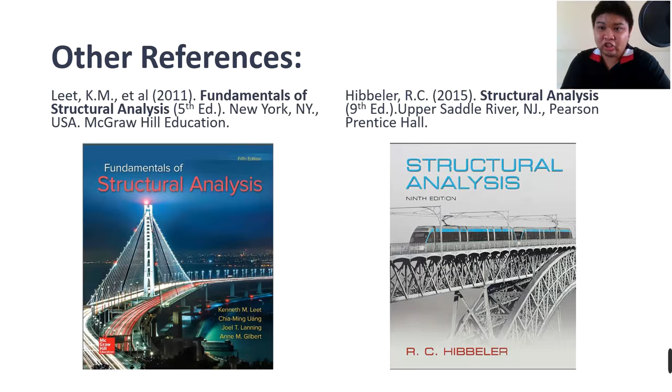So what are my references? My main reference is the book of Aslam Kassimali entitled The Structural Analysis, SI version, 4th edition. I also use other references like the book of Kenneth M. Leet and others, The Fundamentals of Structural Analysis, 5th edition, and of course the book of Russell Hibbeler, Structural Analysis, 9th edition. So now let's start na.

So yung unang topic natin is the analysis of propped beams. I-define muna natin guys kung ano ang prop beam. By definition, a propped, or in formal term, a singly restrained beam is a type of beam that has fixed support in one end and simple support in the other side of the beam. Usually it is considered as statically indeterminate beam to the first degree.

Thus, the beam has one redundant reaction. So napaka-straightforward lang naman ng definition niya. May fixed support siya at the same time may simple support. Pwedeng magkabaliktad yan, plus pwedeng dito sa kaliwa, this is a simple support and sa kanan is the fixed support. Let me remind you from our discussion sa analysis of beam, you may look for the playlist of that in my YouTube channel. So alam natin na ang ibig sabihin ng simple support, it can be hinge, it can be roller.

Kasi for as long as beam ang pinag-uusapan natin, hindi na natin na-distinguish ang pinagkaiba ni hinge saka ni roller. And lastly, para mapatunayan natin that the structure is statically indeterminate to the first degree, kung maalala niyo sa criteria for the stability and determinacy ng structure. So ano nga yun? The reaction ba is less than, equal, or greater than 2M. I-remind ko lang kayo na this is 2M kasi beams ito. Pero kung 3M ito, kino-consider na natin yon generally including the frames, right? Okay, so ito ang gagamitin natin.

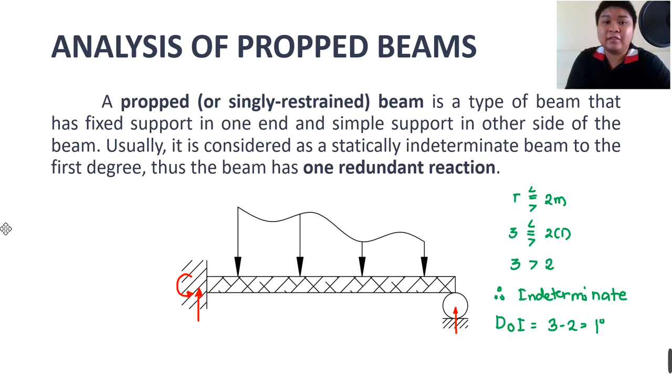Okay, itong discussion natin, mas maiintindihan natin siya kapag may given na example. Magsasagot ako dito ng isang example. Well, of course, the other following videos, yun naman yung other examples. Kasi naniniwala ako na mas maiintindihan niyo yung topic kapag mas exposed kayo sa maraming example. So sige, simulan na natin yung pag-solve.

So ito na yung example number 1, this is a very basic one. A propped beam is loaded as shown below. Assume that the beam is homogeneous and prismatic. Kung maalala niyo last time, when we say homogeneous, the material is constant all throughout. So halimbawa, steel, dapat steel siya all throughout. Hindi pwedeng steel dito sa first half, then copper on the other half. Hindi na yun homogeneous.

So yun yung ibig sabihin ng word na homogeneous. And when we say prismatic, if you recall, ang meaning ng word na prismatic, yung cross-sectional dimension ng ating section ay parehas all throughout. So kung bilog dito, dapat all throughout. Kung ano yung diameter dito sa left end, ganun din. Sa midspan, lahat hanggang sa right end. So yun yung ibig sabihin ng word na prismatic.

And sa analysis natin, ang ibig sabihin guys ng word na homogeneous and prismatic, ang buong span ng ating beam ay merong constant na flexural rigidity. So it has a constant flexural rigidity.

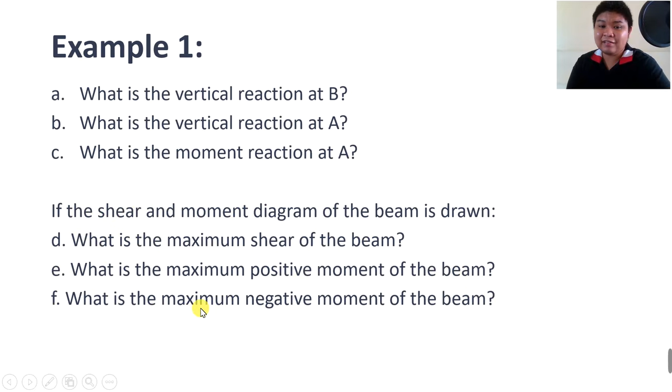So what are the questions here? For example number 1, what is the vertical reaction at B? Number 2, what is the vertical reaction at A? Number 3, what is the moment reaction at A? Then, if the shear and moment diagram of the beam is drawn, number 4, what is the maximum shear of the beam? Number 5, what is the maximum positive moment of the beam? And lastly, what is the maximum negative moment of the beam?

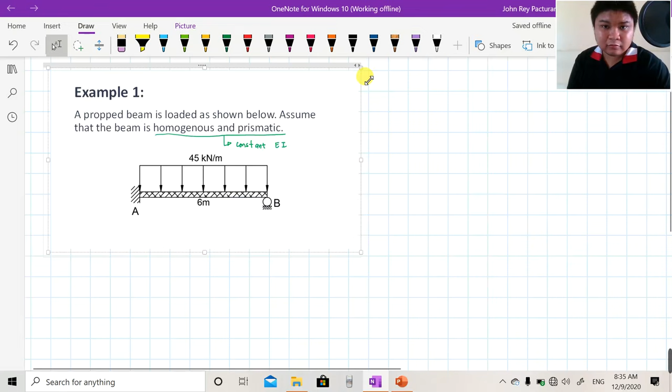So, sige guys, simulan na natin yung ating analysis. Punta tayo sa OneNote, tapos simulan na natin tong i-solve. I-paste ko lang din itong mga question. Ayan na. Okay, so simulan na natin tong i-solve.

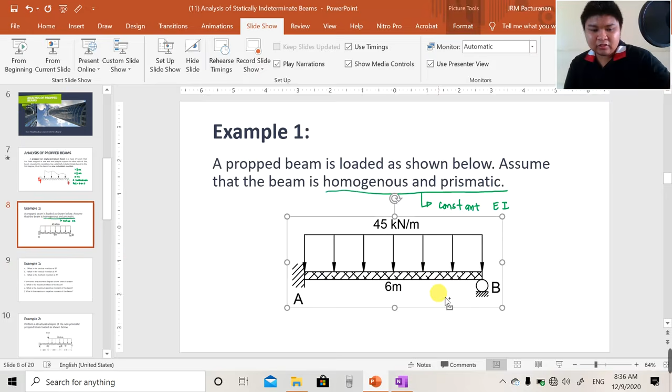Solution. Well, of course, since this is an indeterminate structure, napag-aralan na natin na meron din nitong tatlong reactions, di ba? Kunin ko muna to, Control C, tapos punta tayo sa ating OneNote. Wait lang, i-drawing ko na lang tuloy. Mano-mano, madali din naman tong i-drawing.

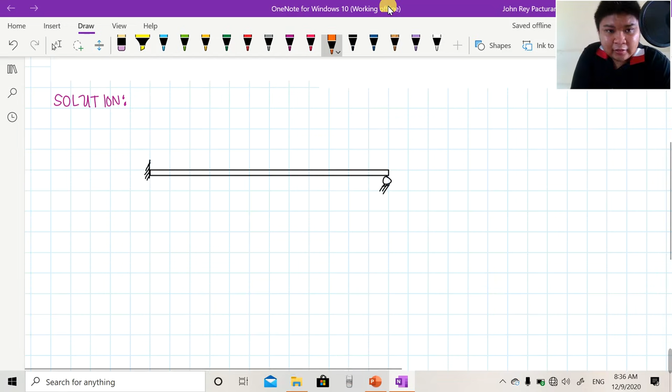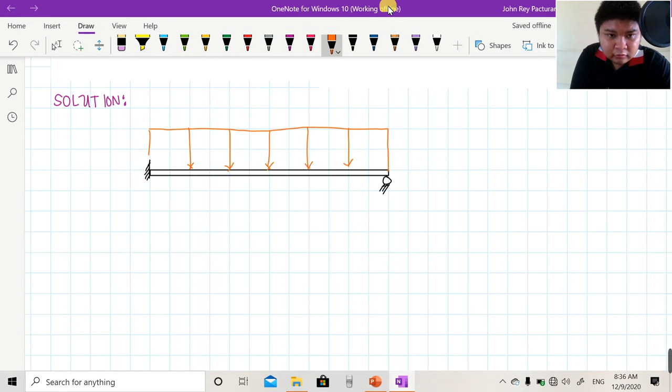So 6 meters yung span natin and the beam is loaded with uniform load all throughout the span. So ito yung simple support, tapos ito yung fixed support, and our magnitude of load ay 45 ba? Check natin siya, no? So ayan. 45 kilonewton per meter. So, 6 meters.

And ilagay na natin class yung mga reaction. So, for instance, ang RB, tapos RA, and lastly, moment at A. So, ito yung ating mga reactions na i-consider.

So, ang goal natin dito is hanapin muna natin class yung isa dito sa tatlong reactions using either the double integration method, the moment area method, and the conjugate beam method. Okay, actually, pwede naman gamitin yung virtual work method, pero reserve na lang yon for the next chapter, which is the analysis of statically indeterminate structures using the force method. So ngayon, ang tututukan lang natin dito is yung double integration, tapos area moment or moment area and the conjugate beam.

So halimbawa, pwede mong isolve yung RA lang or yung MA lang, pero mas preferred dito na kapag prop beam ang pinag-uusapan yung reaction sa simple support, itong RB. And ang goal natin, after nyong ma-solve class yung reaction sa RB, gagamitin mo na lang yung equations of equilibrium to solve for the other reactions. Okay? So, sige, yun yung unang goal natin, solve for RB.

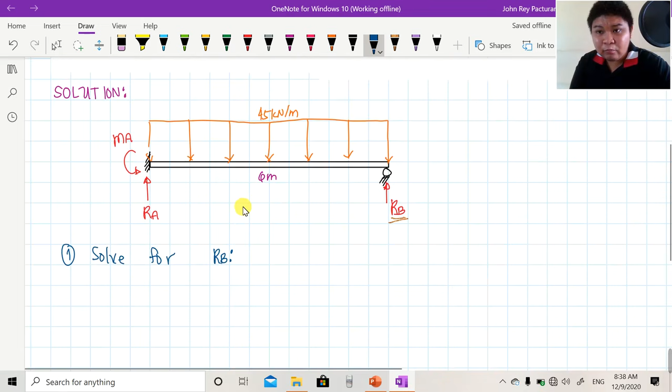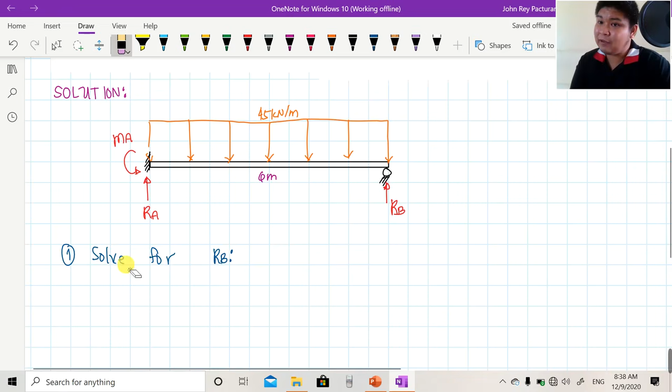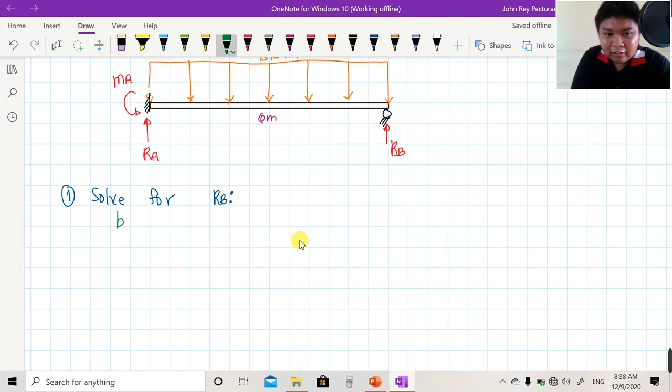So for this video, ipapakita ko kung paano natin siya isosolve using the double integration method, the moment area, and the conjugate beam. So lahat ng tatlong yon para at least after nyong makita, pipili ka na lang kung alin doon sa tatlo ang trip mong gamitin in the future analysis. And yun na nga, as I said, sa following example, for the future examples nito, isang method na lang yung gagamitin ko. But for the meantime, gusto ko munang i-illustrate kung paano natin isosolve yung RB using the double integration method. So by DIM, pwede muna natin na hanapin yung MA tapos yung RA in terms of RB.

Okay? So, Control C muna tayo. Tapos, paste natin siya dito. Control V.

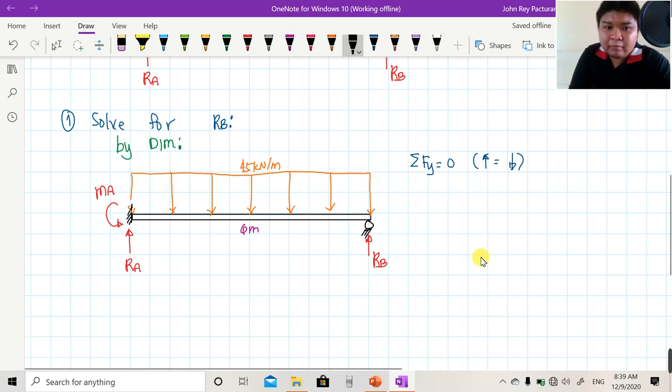Sige. Using equation of equilibrium muna tayo. Summation, forces, vertical equals 0. So, up equals down. Ang mangyayari dito, meron tayong upward force na RA, tapos meron tayong RB na upward, and that is 45 times 6. So therefore, ang RA natin in terms of RB, kapag kinompute mo yung 45 times 6, ang magiging sagot ay 270. So syempre, minus RB. So ang point ko dito, pwede naman na nating palitan class yung RA into 270 minus RB. So para lahat na ng reactions natin ay in terms of RB.

So the same thing ang gagawin natin para mahanap natin yung moment sa A na naka-express sa RB. So summation moment at A equals 0, clockwise moment equals counterclockwise. So ang clockwise moment natin is actually isa lang, di ba? Yung 45 kilonewton, tapos multiply natin ng 6, multiply natin ng 6 over 2, the rest ay counterclockwise. MA, tapos plus RB times 6.

So therefore, yung MA natin, kapag kinompute natin yung 45 times 6 times 6 over 2, ang magiging sagot ay 810 minus 6RB. Okay, isulat ko lang siya. Instead of MA, ang gagawin ko, 810 minus 6RB. So ayan, imbis na tatlo pa yung unknown natin, isa na lang yung unknown natin.

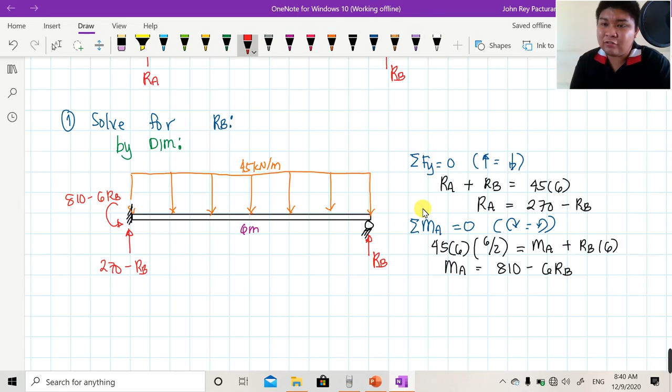And ang kagandahan dito, since yung ating load ay uniformly distributed all throughout, isang moment function lang yung kailangan nating i-derive. Okay, so therefore kailangan natin yan i-derive, kailangan mag-cut tayo dito.

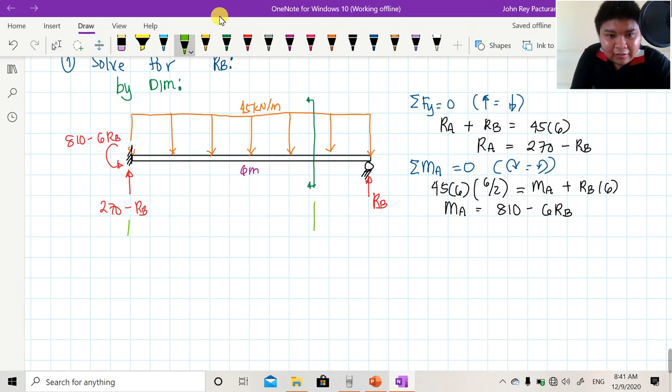So kung maalala nyo, palaging double integration. Tapos iseset natin itong distance na to as x. Okay, so by the way nakalimutan ko palang i-label na this is point A and this is point B. Now pag kinonsider natin itong point x, tapos ide-derive natin yung moment function niya.

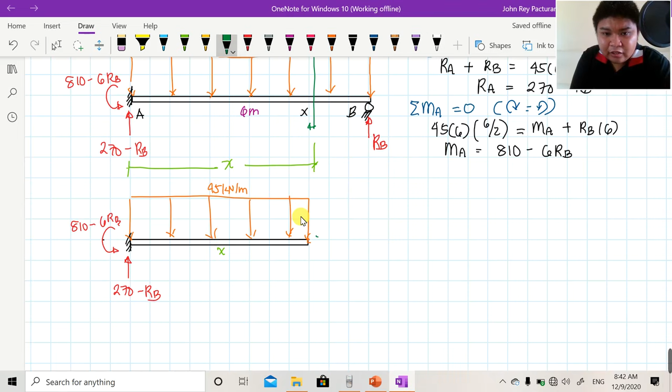So drawing natin siya class. This is 45 kilonewton per meter and this is the distance x. And again, ang ilalagay ko dito ay 270 minus RB and ang ilalagay ko na lang dito as reaction 810 minus 6RB. Ang concern natin is yung moment sa x, so syempre ilalagay natin dito as moment. So familiar naman kayo na dapat counterclockwise ang positive convention.

So again, ang kailangan natin gawin dito is ma-derive natin yung moment function. So summation, moment at x equals 0, clockwise moment equals counterclockwise moment. So ang clockwise moment natin actually, considering point A, considering point x, ay isa lang. Isa lang yung i-consider natin, yung 270 minus RB and ang distance niya ay x.

The rest ay counterclockwise, di ba? So 810 minus 6RB. Tapos yun din, kaya lang tama naman siya no? Yes, tama, kasi yung distance niya class ay x. So therefore, iseset natin siya as x raised to 0.

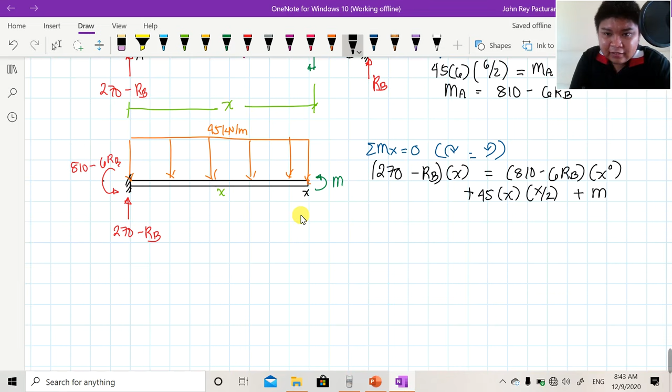Kung maalala nyo, ito ang ginagawa natin kapag double integration method. On the other hand, 45, tapos ang distance niya ay x, then x over 2. Lastly, yung moment natin. So pag sinimplify natin to, ang magiging dito ay 270 minus RB ng x. Then that is equal to 810 minus, para mas maganda ko na lang to times x, 810 minus 6RB times x raised to 0 plus, isimplify natin to, 45 over 2 x squared plus moment.

So yun, na-derive na natin yung magiging moment function dito. So yung moment function is equal to 270 minus RB ng x minus 810 minus 6RB x raised to 0 minus 45 over 2 x squared.

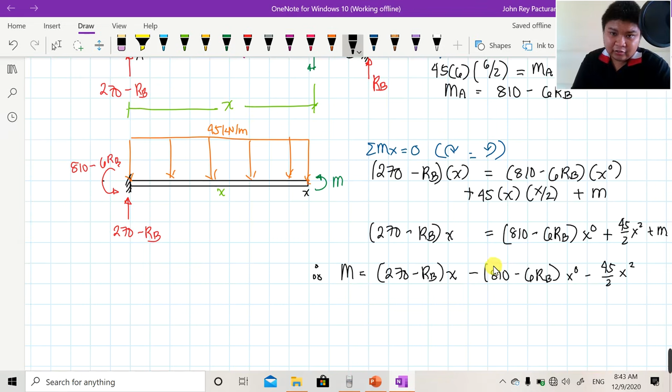So after natin ma-derive yung moment function, ang next na gagawin natin is ilagay ko muna dito na EI y double prime is equal to, isulat ko lang siya, yung na-derive natin before tayo mag-double integration. Ayan, so ready na tayo sa unang double integration or unang integration.

So ang magiging EIy prime natin ay 270 minus RB. And of course, instead of x, ang magiging ano dito ay 1/2 x squared. Tama ba? Yes, ganon. And next is magiging 810 minus 6RB. And from x raised to 0, magiging x to the first power lang. And lastly, minus 45 over 2, then lagay na natin dito na x cubed over 3. And of course, do not forget the arbitrary constant na C1.

So kapag inayos natin to, ang magiging kalalabasan ay 1/2 ng 270 minus RB, then x squared, minus 810 minus 6RB ng x. So lastly, yung 45 divided by 2 times 3 para ma-simplify natin, minus 15 over 2 ng x cubed plus c sub 1. So ayan guys, natapos na natin yung unang integration.

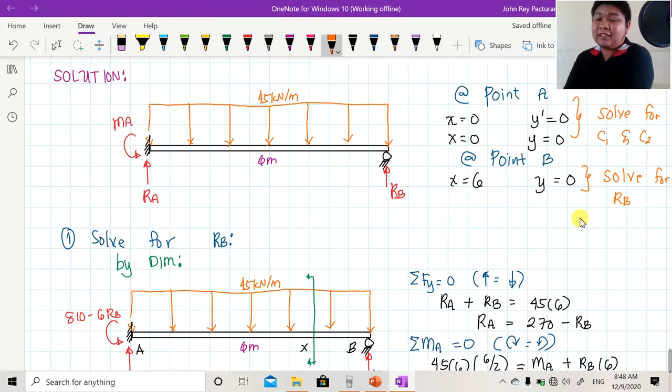So ano yung magiging purpose nito? Kasi kung maalala nyo, ang kailangan lang naman talaga natin ay dalawa. Okay, so itong unang dalawa, itong para sa fixed support, para ma-solve natin itong C sub 1 and C sub 2. Yun naman talaga ang purpose nitong unang dalawang boundary condition na nasa point A. However, itong pangatlong boundary condition, ito ang gagamitin natin para ma-solve natin yung mismong RB. Di ba? Para ma-solve mo yung mismong reaction. Okay, so ulitin ko, itong unang dalawang boundary conditions sa point A, gagamitin natin yan para ma-solve mo yung C sub 1 and C sub 2. Pero itong ating point B, gagamitin natin yan to solve for RB considering the double integration method.

Okay, so sulat natin yan na solve for C sub 1 and C sub 2. So yung unang boundary condition, as I said, ano nga yun, no? At x is equal to 0, C sub 1, at x is equal to 0, y prime is equal to 0. So gamitin natin itong unang integration process.

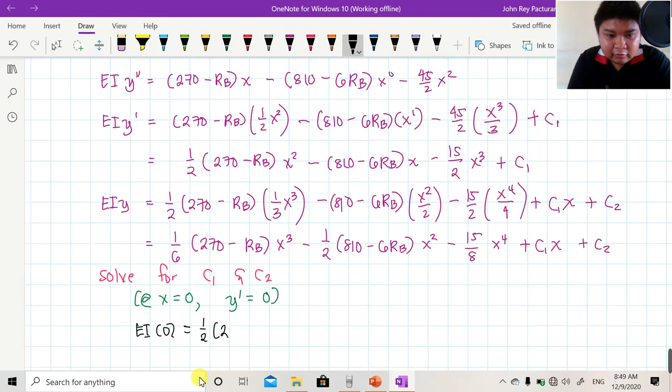So therefore, ang kalalabasan nun class, EI ng 0, I am using this one, no? Okay, I am using this one kasi ang y prime ay 0 is equal to 1 half ng 270 minus RB, well of course, x squared is 0 squared minus 810 minus 6RB and that is 0 and minus 15 over 2 ng 0 cube plus C sub 1. So generally speaking, kahit wag ka nang mag-calculator, automatic ito magiging 0 and ito rin, no, may 0 din siya class. So therefore, cancelled out, ganun din dito, 0. At the same time, ito din 0. So napakasimple lang naman nito, automatic, pwede na nating sabihin na yung C1 ay 0.

Okay, so next, yung pangalawang boundary condition natin na as I said, at x is equal to 0, this time yung y naman ay equal sa 0. So therefore, ito na yung ating gagamitin, itong EIY. So EI times 0, kasi yung y natin ay 0, is equal to 1 over 6, 270 minus RB, and this will be 0 cube, minus 1 half ng 810 minus 6RB, and x squared is 0 squared, minus 15 over 8 ng x to the fourth, so which is 0 to the fourth, plus c sub 1, 0 plus c sub 2. So katulad din kanina class, automatic, ito magiging 0, so as these remaining values. So magiging 0, 0, and 0.

So pwede na natin ditong i-conclude na yung C2 ay equal sa 0. Okay, so ayan, nalaman na natin na yung C2 ay equal sa 0. So therefore, since alam na natin na both C1 and C2 ay 0, pwede ko na class isulat na yung EIY is equal to 1 over 6, again EIY lang, 1 over 6 ng 270 minus RB, then x cube, minus 1 half ng 810 minus 6RB ng x squared, minus 15 over 8x to the fourth. Again, pwede nyo ma-cancel out both C sub 1 and C sub 2. So meron na tayong EIY.

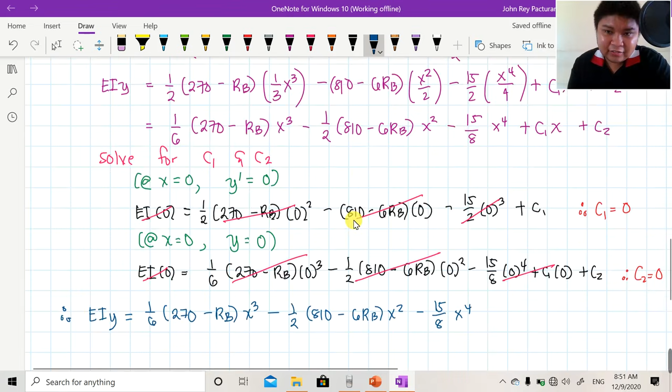And as I said, balik tayo doon sa taas. Ang purpose nito is para ma-solve yung RB. So therefore, para ma-solve yun, isa-substitute na natin yung pangatlong boundary condition. Okay, solve for RB. So ano nga yun? At x is equal to 6, y is equal to 0. Kasi tingnan nyo, pag isa-substitute ko yung y equals to 0 dito and x equals 6, wala naman ng ibang unknown na mahahanap or na makikita sa equation kundi yung RB. Okay, so sige, sulat natin siya.

EI times 0 is equal to 1 over 6 ng, tama, EI times 0. 270 minus RB, yung x pala yung equal to 6, no? 6 cube minus 1 half ng 810 minus 6RB, then that is equal to 6 squared minus 15 over 8, then 6 to the fourth.

So, of course, alam nyo naman na ito magiging 0. So, you may use numerical analysis or shift solve. So, yung magiging reaction natin sa B, which is yung goal natin, ay equal sa... meron naman akong calculator sa screen. So, pwede na lang natin siyang i-type then shift solve.

So, 1 over 6 ng 270 minus RB tapos 6 cube. Tama ba? Minus 1 half ng 810 minus 6x tapos 6 squared. Then minus 15 over 8, then 6 to the fourth.

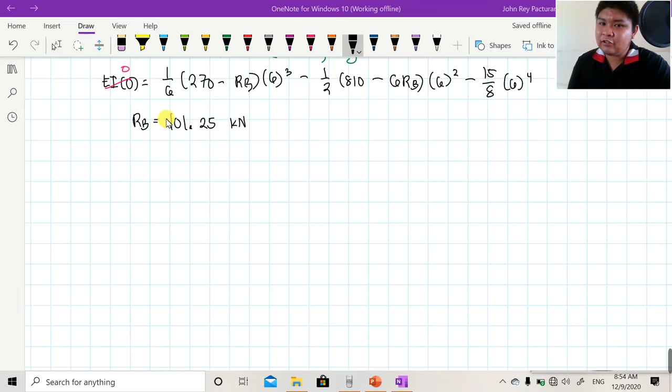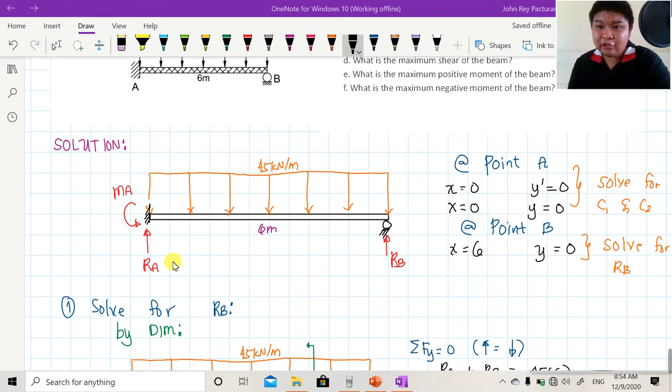Ganun lang naman yung magiging process natin, class. Okay? Now, ang gagawin ko naman, siyempre mahaba-haba itong first video natin, what if another method ang gamitin natin para mahanap yung RB? Ulitin ko lang ang goal ko muna, gagamitin ko muna the double integration, the moment area, and the conjugate beam para mahanap yung RB. Then after nun, using equations of equilibrium na lang para mahanap both yung RA at the same time yung MA.

Okay? So, ang next method na gagamitin ko dito is using the moment area theorem. So, ang gagawin natin dito, of course, i-drawing muna natin yung ating structure. Tapos, kailangan nating i-drawing yung moment diagram by parts niya. So, kung maalala nyo, no?

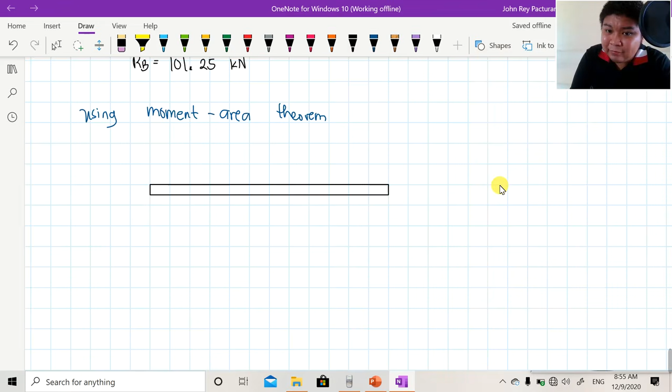So, mas madali itong moment area kaysa sa double integration. Pero, syempre, kayo na lang ang magde-decide kung alin sa inyo yung mas trip nyo.

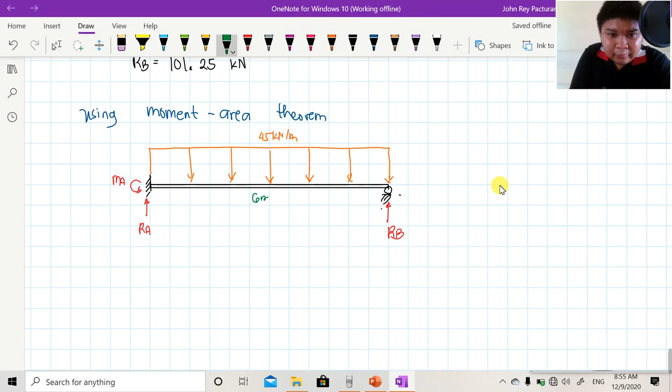So, halimbawa, this is RA. Tapos, this is moment at A. At the same time, this is RB. So, drawing natin yung 45 kilonewton na distributed load. Ito siya 45 kilonewton per meter, and this is 6 meters. Basta tandaan nyo, ang goal natin dito ay mahanap natin yung reaction sa B.

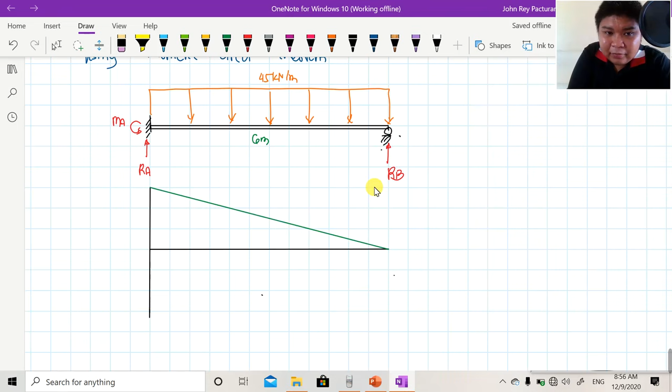So this time, idodrawing ko na, class, yung moment diagram by parts ko dito, and ang magiging fixity ko is itong point A. So di ba dito ang aking reference sa point A. So pag drawing natin yan, ang kalalabasan, since RB is upward, ang magiging diagram is RB times 6. Tama ba? Yes, magiging tama yan. RB times 6. So therefore, linear yan dahil galing siya sa concentrated load na RB.

If you want to understand further yung process natin ng pagdrawing ng moment diagram by parts, you may look for the playlist for the deflection and rotation using the geometric methods. Nasa same YouTube channel ko pa rin siya.

Okay? So, ulitin ko, itong RB, since ang distance niya ay 6 meter from point A, ang ginagawa na natin ay moment diagram by parts. So, literal lang naman ng magiging sagot dito ay 6 RB. And this will be a first degree function.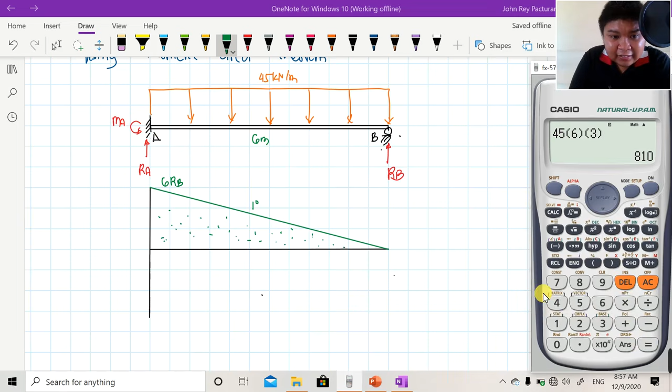Okay? On the other hand, dito tayo sa 45. So, yung 45 natin multiplied by 6. Tapos, considering point A, yung kanyang distance ng center of gravity ay 3 meters. So, ang sagot ay 810. So, since parabola siya, since uniform load siya, ito ay magiging 810 or negative 810 if you must. So, this time, this is a second degree.

So, ano naman yung relationship na gagamitin natin dito? Since sa moment area theorem, ang pag-deflect niya, well, of course, exaggerated deflection lang naman to, ay ganito. Alam natin na yung slope sa A, guys, ay horizontal, di ba? Alam natin na yung slope sa A ay horizontal. And since yung point B ay nandito siya, let's say, i-drawing ko tuloy yung slope. Ito yung slope niya, horizontal siya.

And since yung point B natin, class, ay directly magpapas doon sa slope na drawing natin from point A, ang ibig sabihin nito, di ba, yun yung deviation ng B with respect sa slope ng A. So itong magiging rule. Ito na yung magiging deviation ng point B with respect sa slope ng A, dapat i-equate mo yan as 0. Okay? So yun yung magiging process natin. The deviation of B with respect to A is equal to 0, or simply, pwede natin sabihin na EI, deviation of B with respect to A, ay equal to 0.

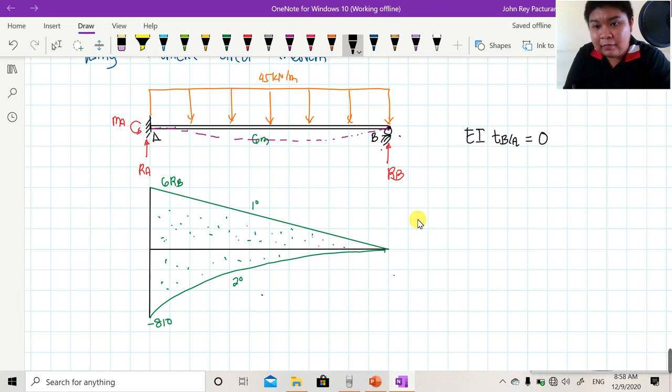Parehas din lang naman yan. Ito lang, class, ang ating gagamitin na formula. Kaya mas madali ang ating moment area kumpara sa double integration method. So, therefore, alam naman natin na ang ibig sabihin nitong formula na to, that is equal to the area between AB, tapos multiply natin ng center of gravity with respect sa point B.

With respect to point B since it comes first, let's use that relationship: EI, deviation of B with respect to A is equal to 0. Let's just use this triangle as positive, so that is equal to 0 equals 1/2 of the base which is 6 meters, and the height is 6RB.

And the center of gravity is located here, which is 2/3 of 6. On the other hand, for the spandrel of the parabola, since it's at the bottom, that is minus, or let's make it plus 1/3 of another 6, but this time negative 810 since it's at the bottom. It's the same thing, again it became 1/3 due to the fact that it's a spandrel of the parabola.

The center of gravity is located here. Do not forget that this is point A and this is point B. Our reference is point B since that's the one written first, so therefore its center of gravity is 3/4 of 6.

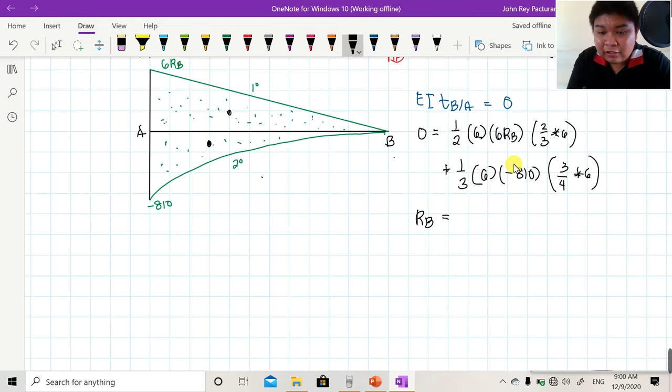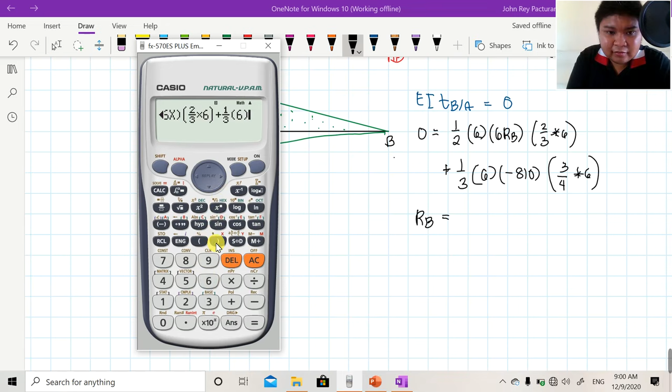Okay, let's try it. 0 is equal to 1/2 of 6, times 6, times 2/3 of 6. Then plus 1/3 of 6, then negative 810, then 3/4 of 6.

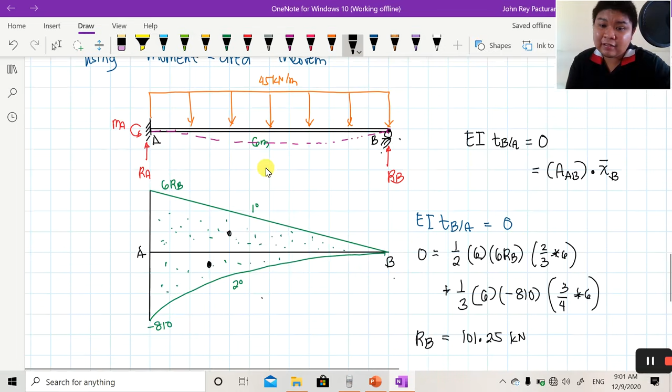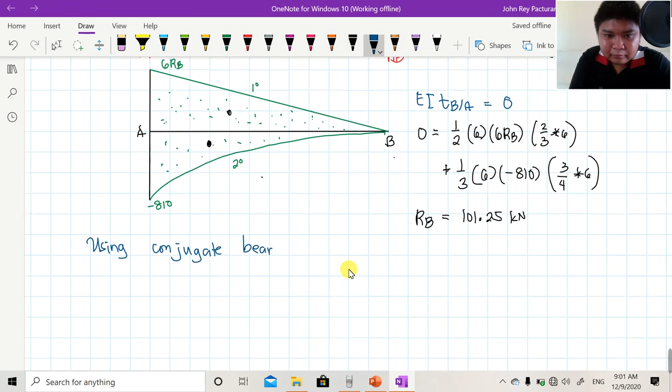But wait, we still have to consider the conjugate beam method. Okay, so using the conjugate beam method, what will happen? Let me draw the real beam first. This is 6 meters, right? Let's draw our actual beam.

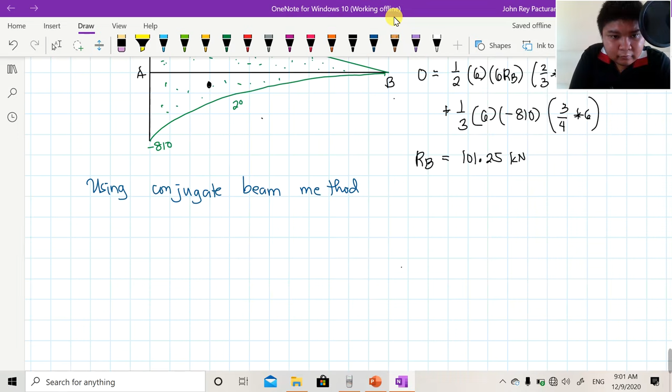Then our distributed load, which is 45 kN per meter. Sorry, I was running out of space. Let me place 45 kN per meter. And of course, we still don't know the reaction, so this will be RB, and this will be RA, and this will be the moment at A.

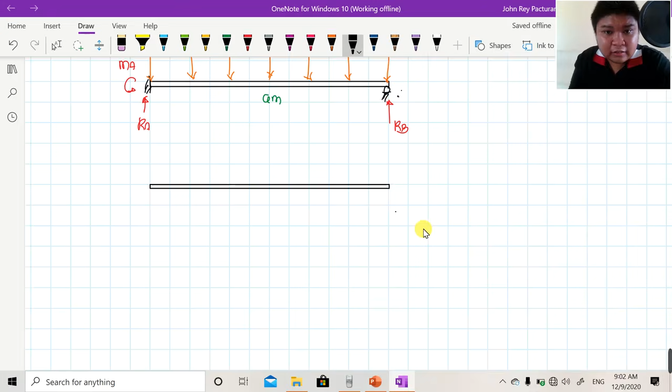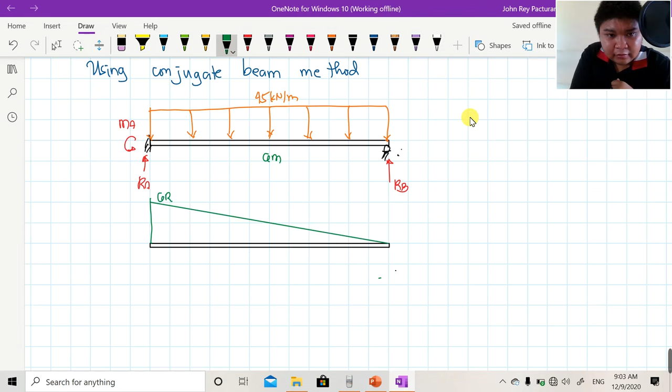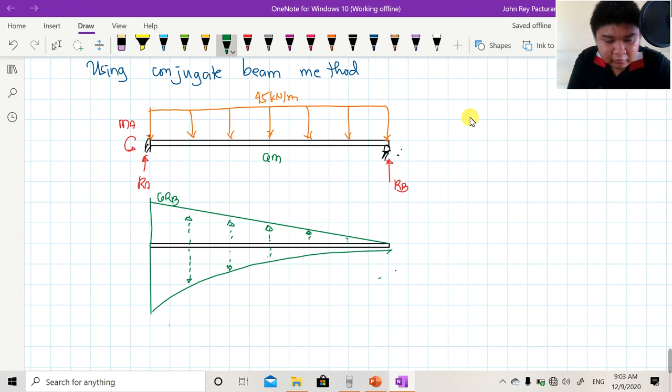We know that here it will become a triangle, and this will be 6RB, but the direction will now be upward. On the other hand, for the spandrel we consider, it goes downward. And this will be, going back to moment area, negative 810.

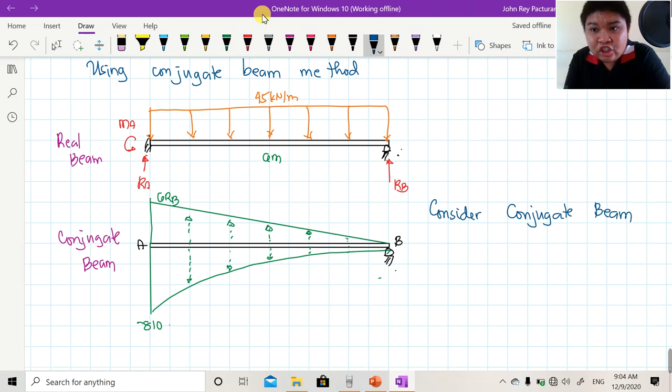So in other words, since our only support is at point B, the only function we can use here is summation of moment at B equals 0. So that will be our only function: summation moment at B equals 0, clockwise moment equals counterclockwise moment.

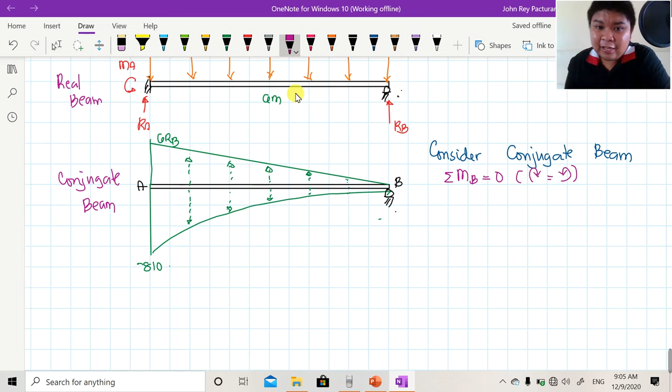So what becomes the clockwise moment here is this triangular load of 6, because if you imagine it lifting up, it will rotate clockwise. Okay, so this will be 1/2 of 6 times 6RB, and the moment arm of the triangle is located at a distance of 2/3 of 6.

Okay, ang counterclockwise moment natin is this spandrel na nakikita nyo ngayon. So, that will be equal to 1/3 ng 6 and 810. Hindi ko na pala nilalagay ang kapag conjugate beam, mga absolute value na lang siya, guys. Tapos, yung kanyang moment arm, yung center of gravity niya is located here as well. So, that will be equal to ilan? 3/4 ng 6. At tingnan nyo, iisa lang naman yung unknown dito.

So, the value of RB will be equal to 1/2 ng 6 tapos 6RB, then 2/3 ng 6, that is equal to 1/3 ng 6, 810, then 3/4 of 6. So, shift solve. Ang lalabas ay 101.25 kN. Na-solve na natin, class, using the three methods na pare-parehas yan, 101.25.

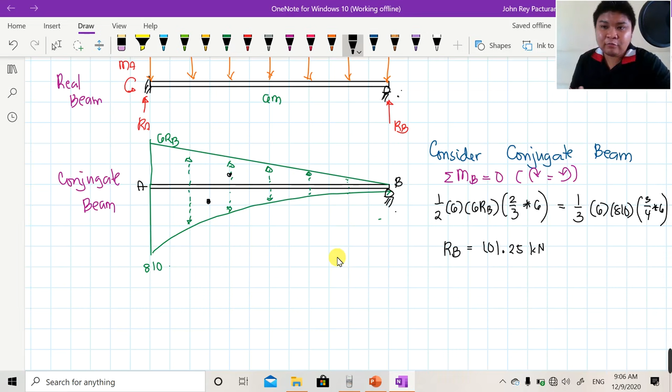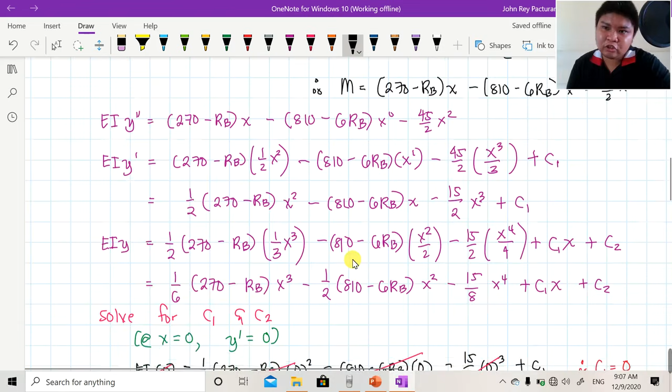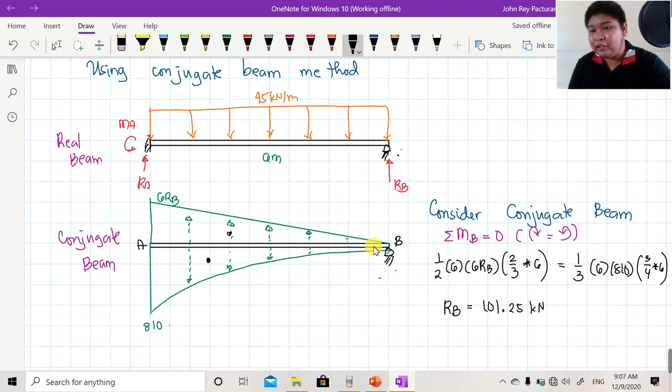Well, of course, hindi naman, class, pwedeng mabago yung ating reaction dyan kahit anong method ang gamitin mo kasi yun naman talagang essence nito. Kahit anong method ang piliin mo, dapat pare-parehas ang sagot. Pero ako, I prefer the moment area method, mas trip ko siya. As compared sa double integration method, I think majority of us naman will agree na masyadong pahirap ang DIM. At pwedeng yung iba mag-agree na mas gusto tong conjugate beam method, but for the purpose of consistency, my next example will focus on the moment area method. Kasi mas madali talaga to, guys, generally.

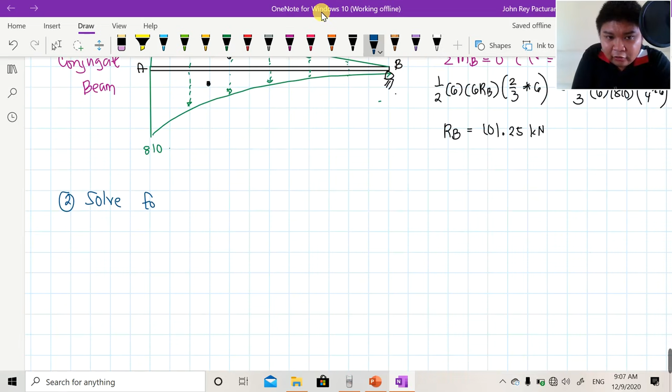So now, the goal is nahanap na natin yung reaction RB, which is 101.25 kilonewtons. So therefore, ang next na magiging step natin, step 1, solve for RB. So yung magiging next step natin is solve for the remaining unknowns, which are the vertical reaction at A and the moment reaction at A.

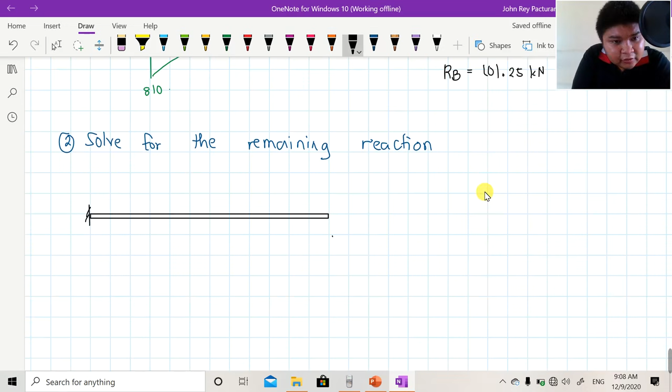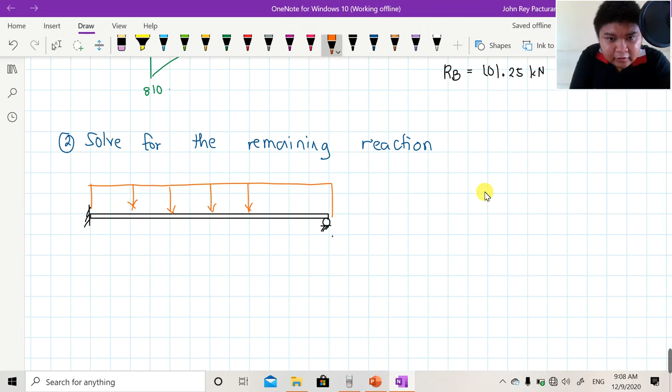So, pag i-drawing ulit natin yung original beam natin, guys. Fixed support dito, roller support siya. Ito yung ating uniform load na 45 kN per meter, 45 kN per meter, and this will be 6 meters as well. Ilagay ko na yung RB natin dito ay equal sa 101.25 kilonewtons. Ang goal na lang natin is the value of RA at the same time the value of moment at A. So, di ba kayang-kaya naman na itong ma-solve using statics.

And as I said, summation forces vertical equals 0, that will be up equals down. So, pag kinompute mo siya, RA plus 101.25 is equal to 45 times 6. So, therefore, ang RA natin ay equal sa 45 times 6 minus 101.25. So, ang lalabas ay 168.75 kilonewton.

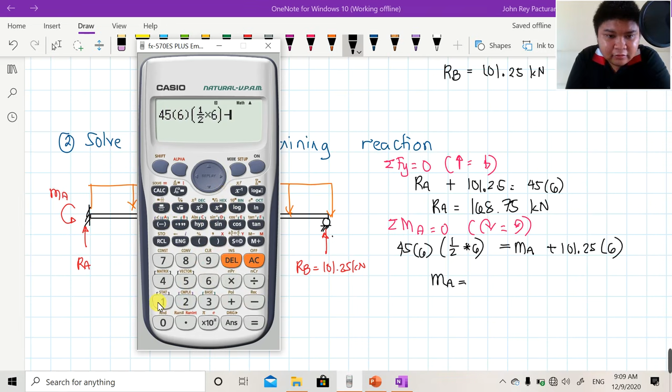On the other hand, ang magiging summation moment at A natin equals 0. Para mahanap natin yung moment at A, clockwise moment equals counterclockwise. Ang clockwise lang is yung 45 times 6 and that will be equal to 1/2 ng 6 kasi yun yung magiging moment arm niya, di ba? The rest ay counterclockwise, that is equal to moment ng A which is counterclockwise plus 101.25 times 6. So therefore, yung MA natin ay equal sa 45 times 6, 1/2 ng 6 minus 101.25 times 6. Ang sagot natin ay 202.5 kilonewton meter. So ayan, na-solve na natin, class, yung RA and MA.

So kung babalikan natin yung ating PowerPoint presentation kanina, na-solve na natin itong question A, question B, and question C. Ang tututukan na lang natin is ito kasi part pa rin talaga ng structural analysis ang shear and moment diagram. So according dito, if the shear and moment diagram of the beam is drawn, letter D, what is the maximum shear of the beam? Letter E, what is the maximum positive moment? And letter F, what is the maximum negative moment? So therefore, yung magiging third step natin is the shear and moment diagram. Draw the shear and moment diagram.

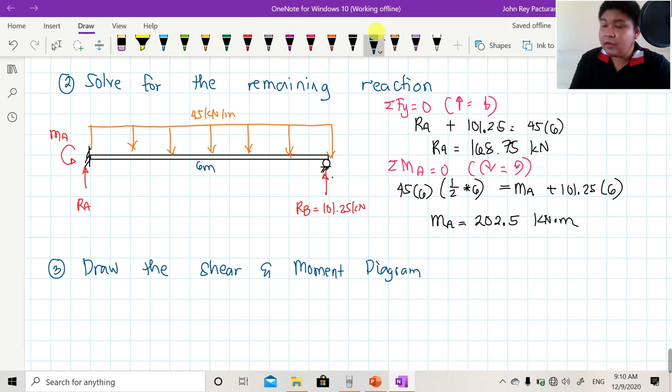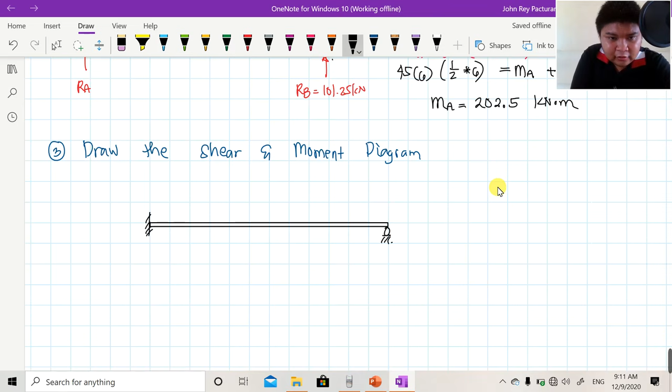Ilagay natin yung uniform load, at ilagay ko siya as 45 kilonewton per meter. But this time, ilalagay ko na, class, yung mga reaction: 101.25 kilonewton. On the other hand, yung vertical reaction sa A ay 168.75 kilonewton. At yung moment reaction ay 202.5 kilonewton meter. Again, 6 meters ito. Tapos, lagay natin na point A and point B. So, simulan ko nang i-drawing yung shear diagram. Drawing natin yung shear diagram.

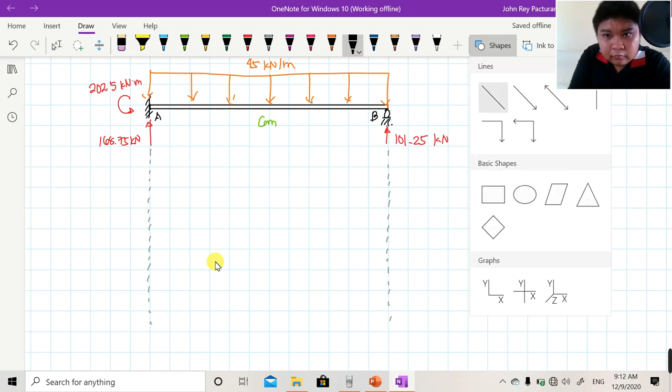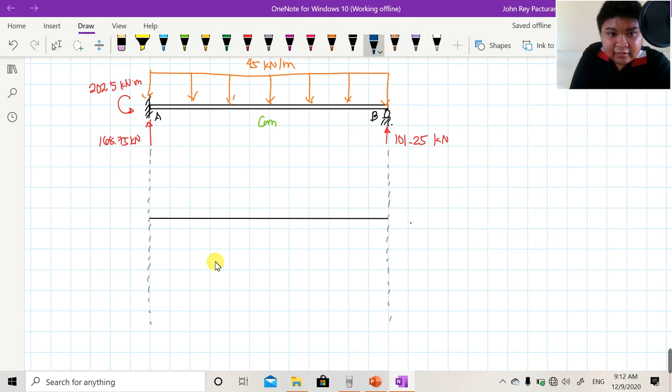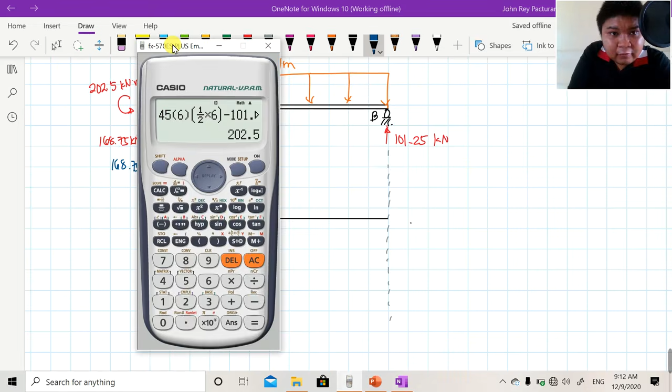Ito yung magiging baseline. So, ang mangyayari dito, guys, 168.75 upward siya. So ilagay natin yon as 168.75. At the same time, mangyayari 168.75 minus 45 times 6, so ang lalabas ay negative 101.25. So that will be located here. Lagay ko siya as negative 101.25 kilonewton.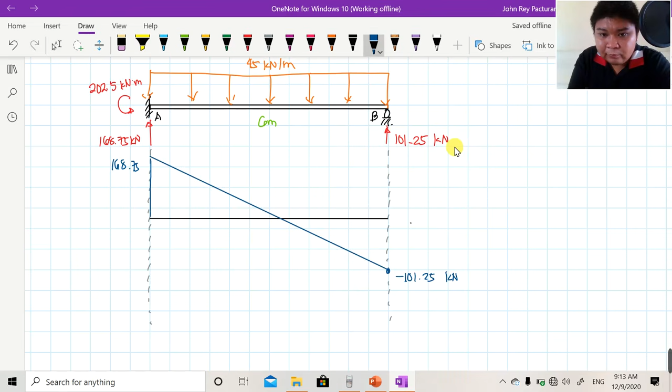At of course, since nagkataon na dito ay 101.25, malamang masasara na yung ating shear diagram. So therefore, ayan na, tapos na yung ating shear diagram. Pero kailangan natin, class, mahanap yung distance na x dito.

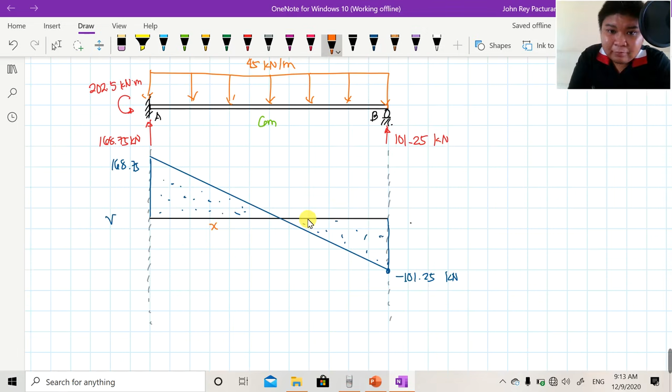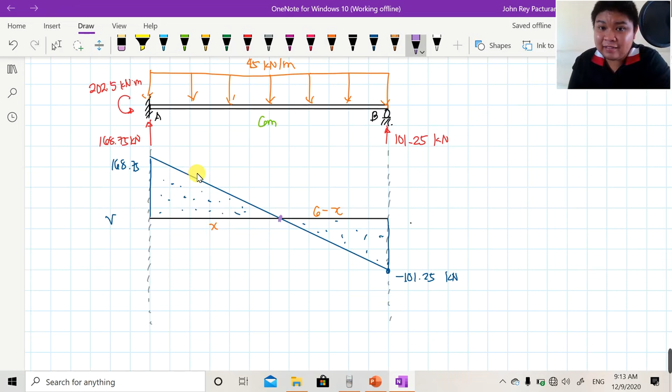Well, of course, yung dito sa kabila, class, malamang magiging 6 minus x. Bakit? Ano nga yung rule natin dito? Itong point na ito kung saan nag-intersect yung shear diagram sa horizontal, ito na yung point of maximum moment. Okay? So kailangan pa rin natin mahanap yan para at least may tanong pa kasi regarding sa maximum positive at the same time the maximum negative moment. So solve for x tayo kahit scratch na lang siya.

Halimbawa, x is to 168.75 is to 6 minus x and 101.25. So therefore, yung magiging value ng x dyan, kapag sinolve natin, x is to 168.75 equals 6 minus x and 101.25. Ang answer ay 3.75 meters. So pag sinubstitute natin itong x na to guys, magiging 3.75 meter. At the same time, yung 6 minus x, malamang 6 minus ans na lang, that is equal to 2.25 meters. So ayan, alam na natin kung saan yung location ng maximum moment.

Pero hindi pa natin alam kung ano yung value ng maximum moment. Erase ko na to kasi nakakagulo din naman to. At the same time, kahit nga i-calculator nyo lang ito, there is no need naman to show the solution there. Oo, for as long as naiintindihan nyo yung concept ng ating discussion.

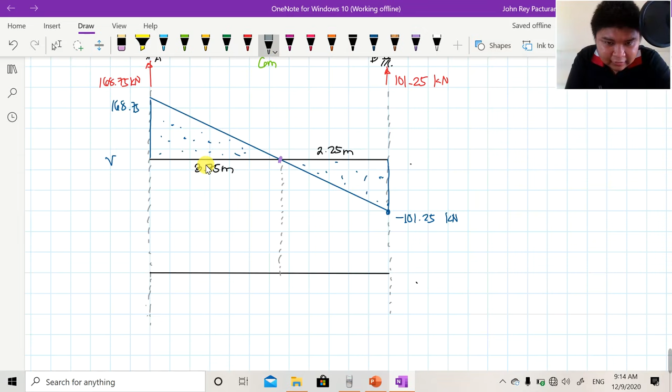So by the way, moment diagram naman na ang next focus natin. Kung maalala nyo dito, meron agad tayong 202.5 kN·m na negative moment. Sa case natin, negative moment ito. You may recall sa mga previous discussion na, pero usually negative moment naman talaga class ang nasa fixed support. Bihira siya mag-positive moment. Ulitin ko, bihira, but in a theoretical sense, pwedeng mangyari. So you may recall sa previous lesson natin na mare-recall nyo yung negative moment nga to.

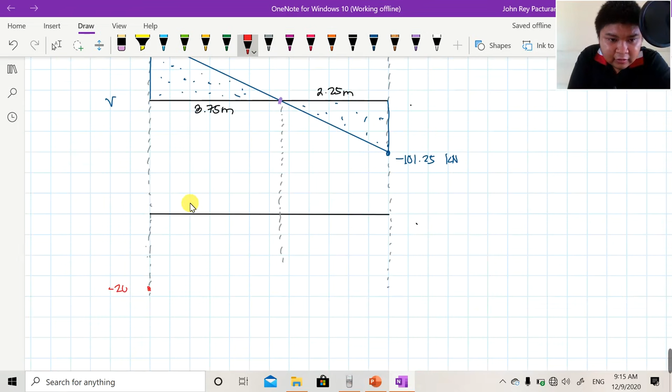So ito, negative 202.5, ilalagay natin siya dito. This will be negative 202.5. Okay, so ito yung panimula. At of course, computein natin itong area dyan. So therefore, since nasa taas siya, therefore this must be positive.

So negative 202.5 plus 1/2 ng 168.75 at the same time 3.75. So ang sagot natin ay positive 113.906. So lagay mo lang siya dito as 113.906. So of course, lagay natin siya as parabola kasi second degree na to.

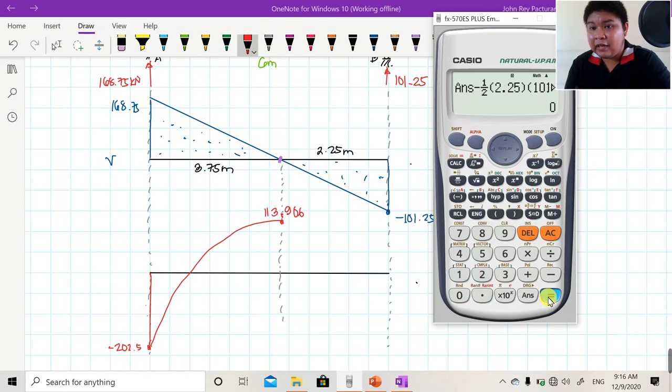Para matapos, minus itong triangle dito dahil yun naman yung kailangan natin dyan. 1/2 ng 2.25 tapos 101.25. Magdasal ka na lang na mag-zero to, kasi kapag hindi yan nag-zero, ibig sabihin hindi balanse yung ating pagkagawa ng analysis. So yan, nag-zero siya ngayon. So therefore, i-connect mo na lang siya dito. So tadan! Tapos na tayo class sa moment diagram.

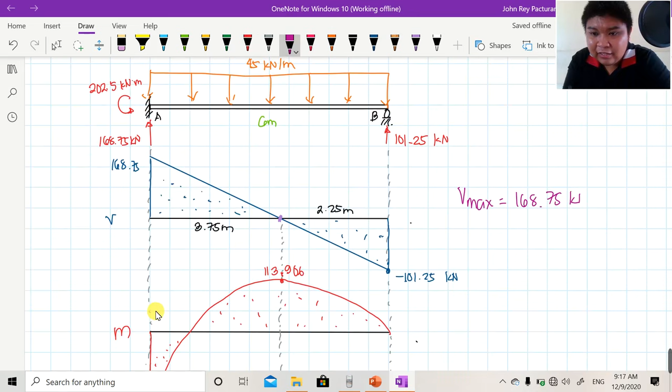At based dito, malalaman natin na merong maximum positive moment, yung 113.906, and maximum negative moment na negative 202.5. So pwede na natin yan ilagay na by shear and moment diagram, yung ating Vmax ay equal sa 168.75 kN. Tapos, yung ating maximum positive moment ay equal sa 113.906 kN and yung maximum negative moment ay negative 202.5 kN. Sorry, paki-correction lang, kN meter.

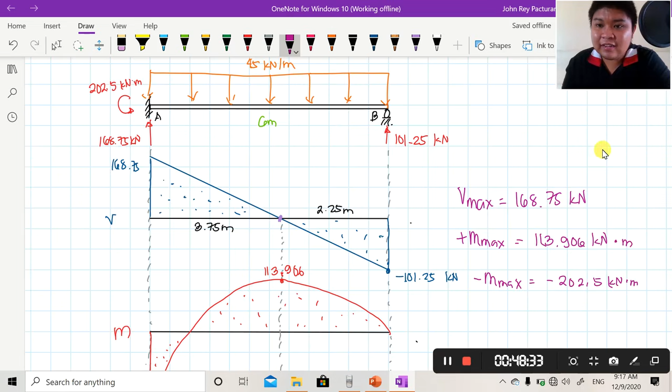So tapos na tayo class sa pag-solve ng maximum shear, positive and negative moment. Actually, na-solve na natin lahat ng questions for this example number 1. So we are now ready to provide the summary of our solution.

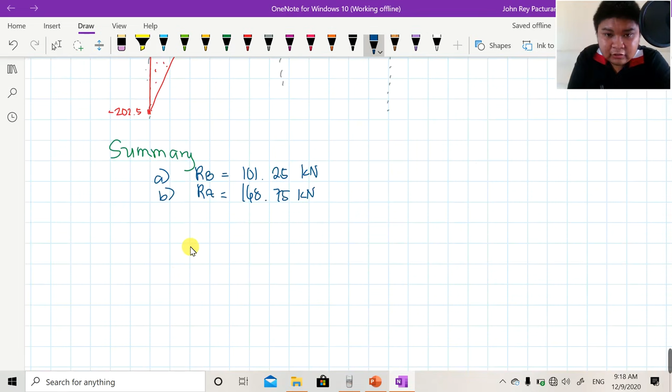So for summary, ang letter A, yung unang tanong is the reaction at B. So ang RB ay 101.25 kN. Yung sunod na tanong is the reaction at A. Kung babalikan natin yon sa taas, the reaction at A is equal to 168.75 kN. And sunod, yung magiging moment sa A ay equal sa, what will be the moment at A? 202.5 kN.

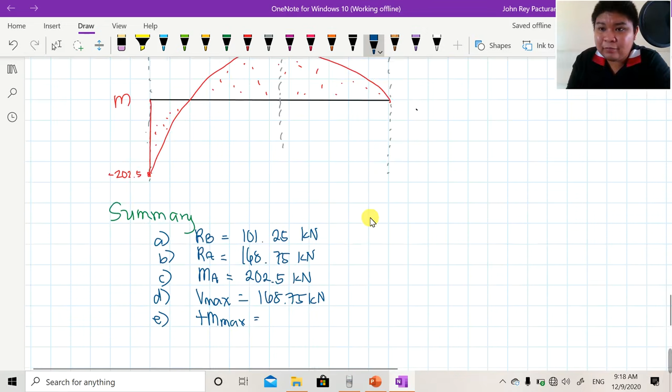Sa letter D, yung Vmax natin, di ba? Yung maximum shear na i-consider natin ay 168.75 kN. Sa letter E, ang i-consider natin na maximum positive moment ay equal sa 113.906 kilonewton meter. By the way, yung moment at A, syempre kilonewton meter. And letter F, yung ating maximum negative moment ay negative 202.5 kilonewton meter. So tadan!

Sa wakas, no? After ng napakahabang process, na-solve na natin itong problem number 1. So this will be our solution for this problem class.